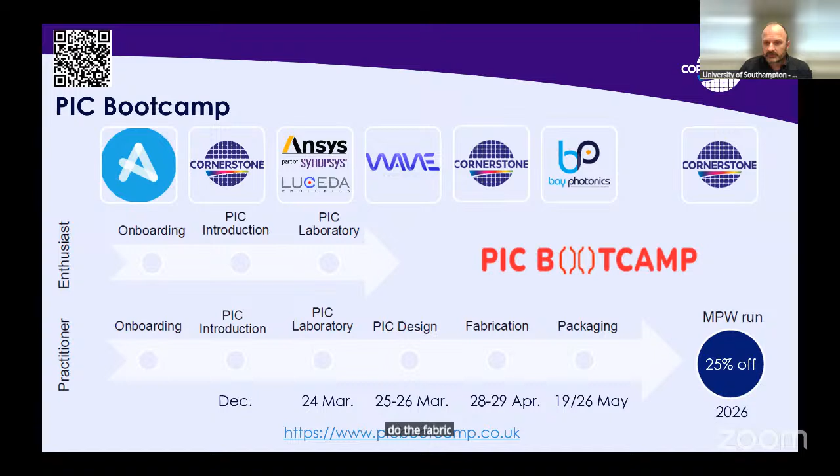We run a bootcamp next year on a number of occasions. If you're interested, just click on the link. Essentially, you come here and interact with different ways of designing these chips and how we actually do the fabrication and measurements. This is quite an interesting training that we run quite regularly, so feel free to click on that.

Now, I wanted to use my second hat to show a little bit of the research and what we use Cornerstone for, and what we do beyond Cornerstone, because we also do our own activity beyond Cornerstone.

So as you know, computing is really power hungry, and we're talking about nuclear power stations to run data centers these days, and literally trillions of dollars to actually feed the infrastructure or even develop it. So this is exponentially increasing. So we need to do something, and this is why we're talking about these things in photonics, I suppose, and all sorts of other activities in neuromorphics as well.

The point of all of this is really to see what silicon photonics can do. There are two ways to look at this: there is data transfer, sending data at the highest bandwidth possible for the lowest amount of energy, and there is also trying to achieve computation using photonics. So I'll touch a little bit on both topics today.

One of the key points in photonics compared to electronics, just to take a step back: the problem with electronics is you have extremely high density of devices, and you can do very fast computation in parallel using GPUs, but the memory is not where the computation occurs. So you need to have data transfer between your memory and your compute constantly, and that costs power, that costs latency. It's a bit of a bottleneck that photonics doesn't really have, and any analog circuit doesn't really suffer this kind of problem.

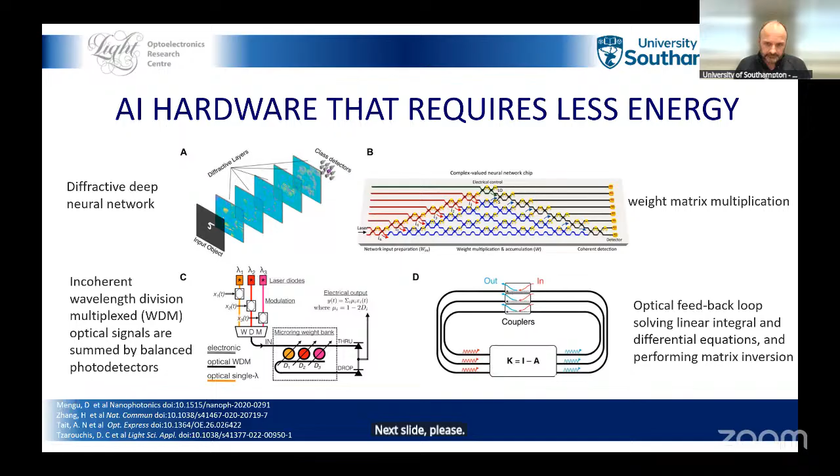Here is an example of what we did with some of the Cornerstone active runs. This is SOI 220 active, for instance. The point of this was just to demonstrate that using a coherent system and PN junction modulators, we could achieve a rate that was way in excess of what, for instance, NVIDIA could produce, with quite a good accuracy as well.

One of the problems with analog type of computation is noise, and that affects your accuracy. How do you deal with that? This is a complex problem that needs to be addressed, and I think we had a bit of a successful system here where we cascaded different types of Mach-Zehnders and tried to achieve this coherent photonic neural network. If you're interested in knowing more, there's a link, and I think the slide will be shared so you can have a look. This was fabricated with the further active runs in Cornerstone.

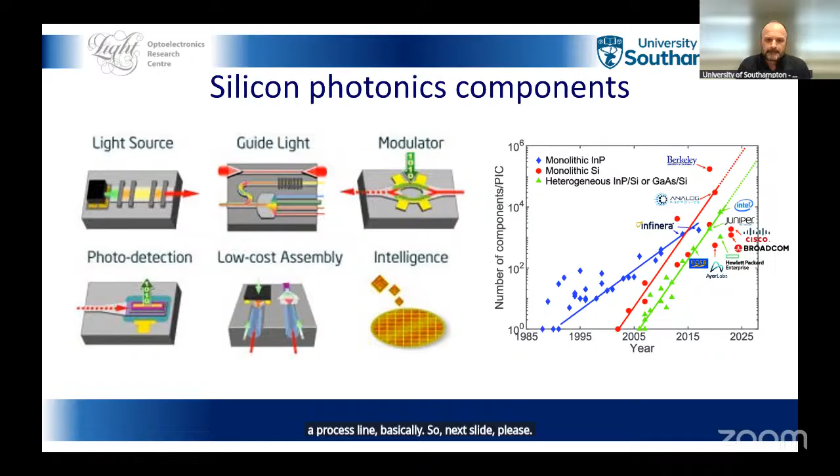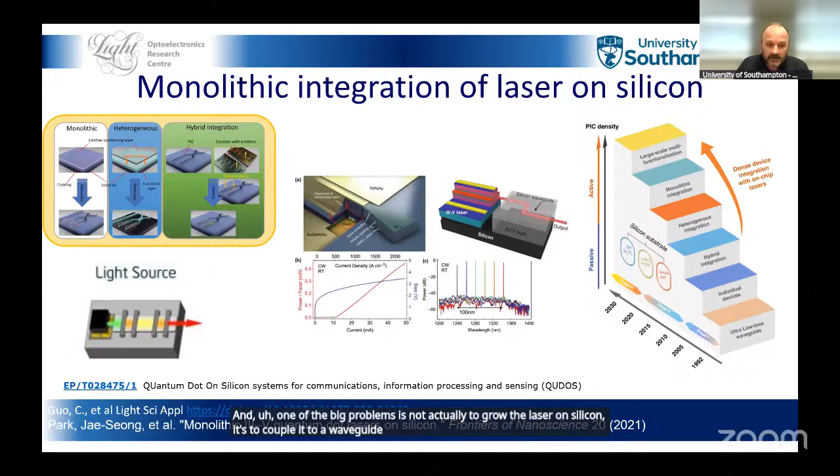So we came up with a process that we can scale up to 200 millimeters and potentially 300. We tried it with the quantum confined Stark effect modulator in the O-band, which is fitted for data centers. The problem with those devices is they're quite thick, a micron plus. So how do you interface that to a waveguide system compatible with CMOS, like silicon or silicon nitride? This is exactly what we've done here. You have this thick stack in the middle, and you try to couple that to a silicon nitride waveguide, as you can see in the cross section at the bottom right. You transfer the light from one to the other, and that works with silicon germanium.

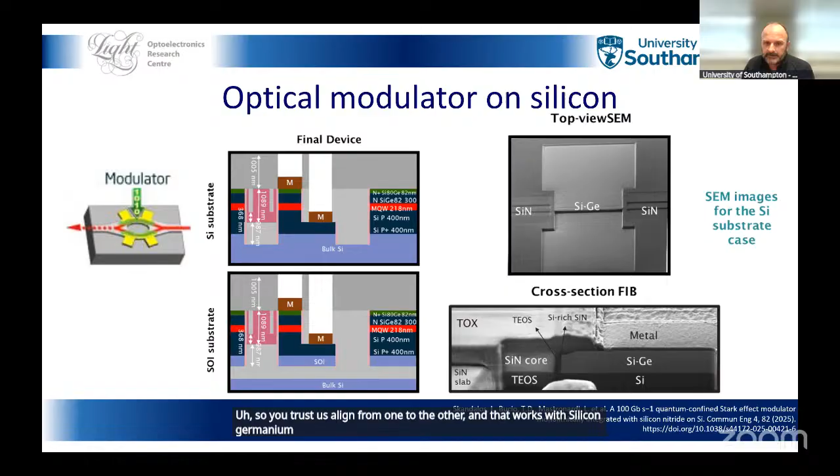That gives you extremely efficient modulation, about 50 microns long, in the O-band. That's quite difficult to achieve with electro-absorption modulators in silicon, because you need a quantum confined Stark effect with quantum wells, matched lattice, and reduced defects. But this is actually possible, and we demonstrated it at wafer scale, getting 100G out of this. So it's showing that we can achieve that. We can transfer the light from high index to low index with about 1.5 dB insertion loss and low reflection.

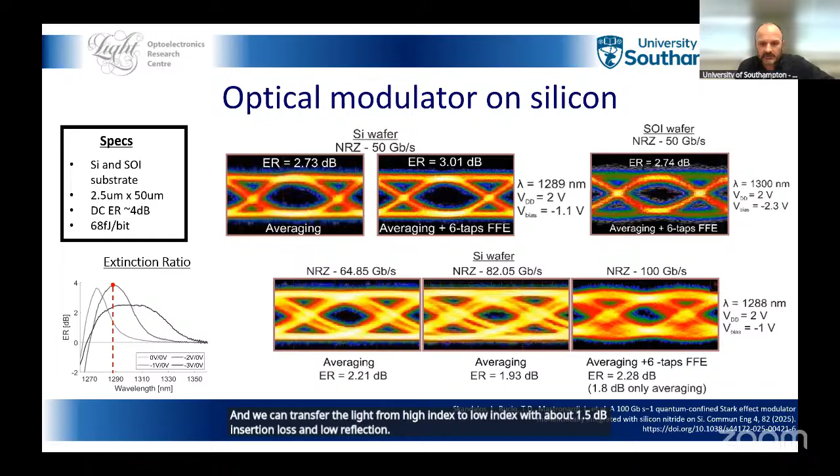The obvious next task is, if you can do that with silicon germanium, you can potentially do that with III-V materials, and this is exactly what we did. You can see that III-V materials, if you have a laser or an amplifier on chip, are 3 or 4 microns thick, so you have to work with that. How do you do it? You use silicon nitride in the same way and try to adapt the mode.

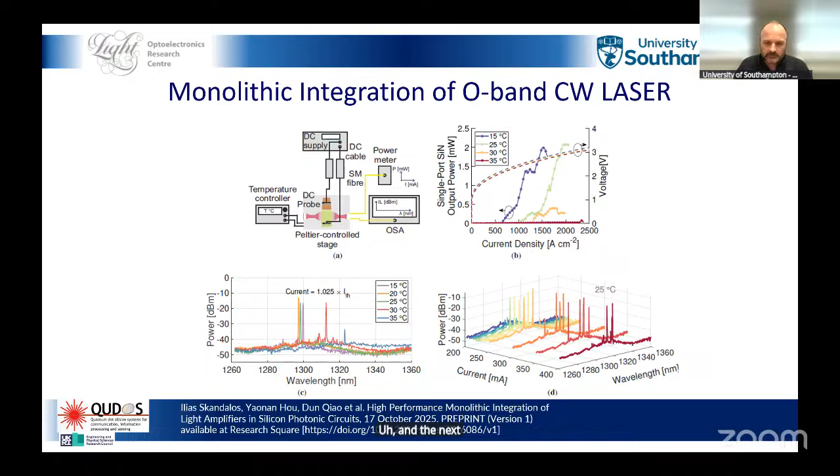This is what we fabricated. You have a device electrically connected in the middle here, with your nitride waveguide on both sides. This is what it looks like, and this is a cross section of the device. We got CW operation out of this, coupled directly to a waveguide. We got a few milliwatts, but we have a couple of iterations on the roadmap that will improve that dramatically down the line. The next step is also to move that to a more stable 200 millimeter platform. That's the CW laser in the O-band.

We also have amplification here, which is the important part, I believe, in any system. If you have switching or any complex system with a lot of cascaded devices, you need something that enables you to amplify your light as you go along—lossless switches, and so on. Again, this is just an early demonstration. We aim for more than 10 dB amplification in the O-band, but this is the first demonstration here.

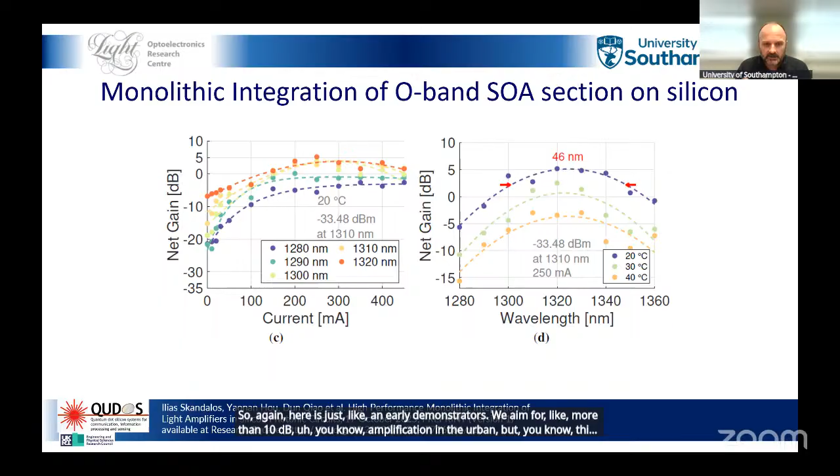So what's next? As I said, for us it's really to drive density of integration, but that comes with needing a native light source and an amplifier. How do you actually achieve that? These were just some examples of what we are planning. Down the line, it's about how you reduce the size of those big lasers, which are 2 or 3 millimeters long, to drive integration further and try to target that VLSI type of system. That's my acknowledgement, and I will stop there. Thank you.

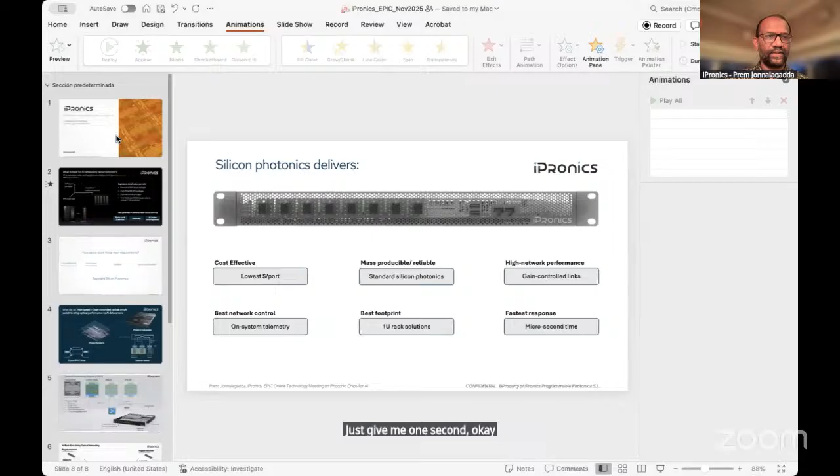Alright, good afternoon everyone. And if you're like me in the Bay Area, California, a very early good morning to you all. Today I'm going to talk about optical circuit switches for AI data centers. That's what we do at iPronics.

I think this is something you all know, don't need to explain too much here, but just to set the context. As you know, the density of AI compute is increasing in terms of GPU dies per package, and also how many GPUs you can fit in a rack, and then how many racks you connect. NVIDIA is executing phenomenally well, releasing a new generation of GPUs every year, and the density is increasing phenomenally. So all this networking for the GPUs has stringent requirements on it. There's the networking within a domain for computation of these AI training workloads, that's scale up, and then connecting all these domains together, that's scale out.

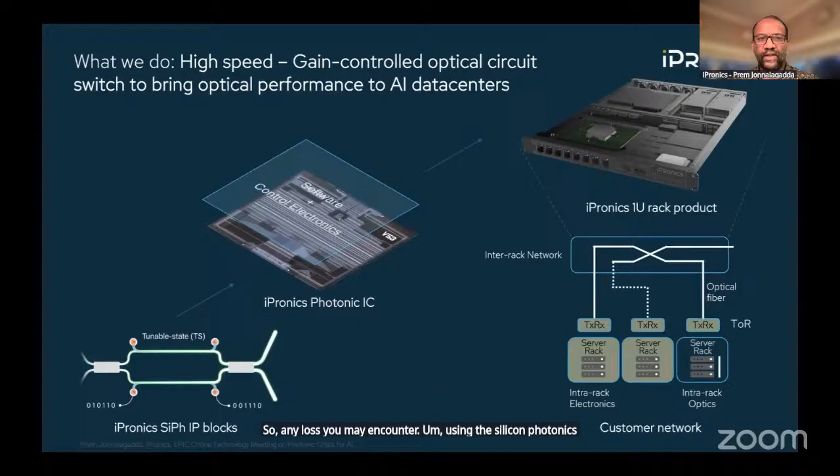Looking at what we have done so far and what we will be doing in the future, at OFC this year we demonstrated our optical networking engine 32, which has 32 ports, and that is sampling to customers since Q2 of this year. We have a 64 port version, 128 and 256 port version on our roadmap.

The system itself, as you can see, has the silicon photonics chip. It has all the control electronics. It has the optical amplifiers, and it's a 1U box for the 32 by 32.

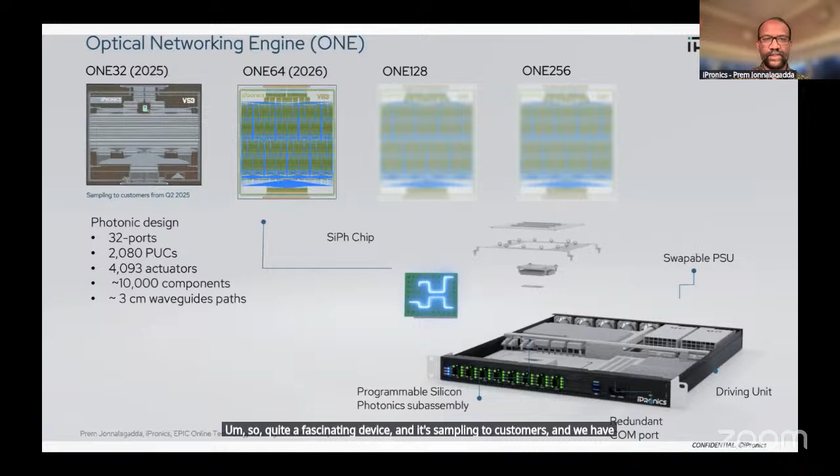It's quite the feat. The chip itself has over 2,000 programmable unit cells, which are basically Mach-Zehnder interferometers. We have about 4,000 actuators, and in total around 10,000 components on the optical subassembly. Quite the fascinating device, and it's sampling to customers, and we have a roadmap to double it next year and the years onwards.

Another interesting thing about our device is it needs to work with existing optical devices out there, whether it's pluggable transceivers, near packaged optics, optical interposers, or even co-packaged optics. You can take the fiber from all of these optical devices and connect them to the optical circuit switch we're building, and you can achieve the optical networking goals that you have.

Using the optical circuit switch, you can actually reduce your link cost, because you're removing a couple of transceivers and potentially an electronic switch in the middle. We also have all the telemetry that is needed, as well as the link gain, which helps with deploying this switch in more places.

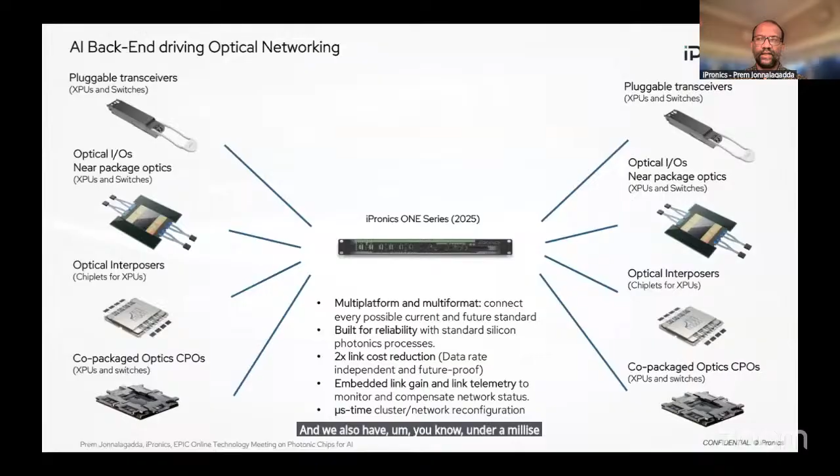And we also have under a millisecond reconfiguration time, which is also helpful for AI workloads.

In summary, we've been using silicon photonics to build these devices, which allows us to build an optical circuit switch that is cost effective. We believe it will be lowest cost per port, with the ability to mass produce these devices and have high reliability.

Other optical circuit switches may use movable parts. There's no movable parts in this one, so that's going to help with reliability. And because we have optical amplifiers, we can bring the optical loss to 0. We also have system telemetry and compact devices, about a 1U rack for the 32 port.

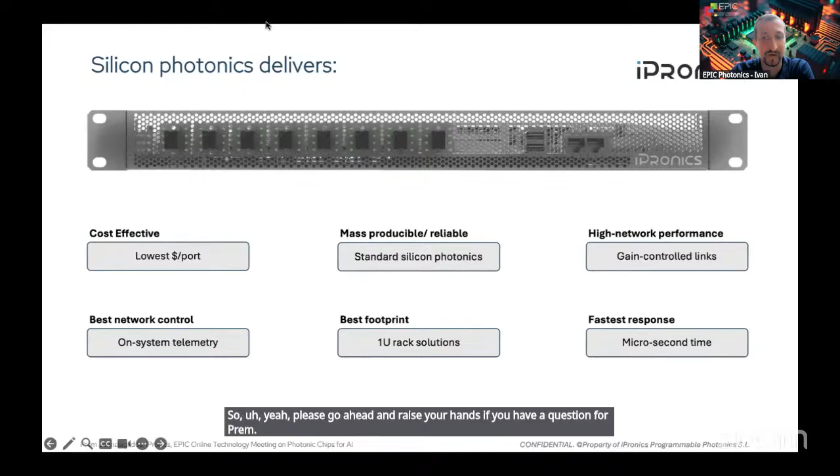In the meantime, I am wondering myself, do you have any forecast for the amount of demand you can get for this kind of device? Yeah, so we are sampling this device to our customers and they are doing evaluations. One number that's out there, public and published by other optical circuit switch vendors, is that in 2030 they believe this market would be about $2 billion of TAM. But we've also heard that it could be much more than that. The most conservative number we have seen is $2 billion TAM in 2030.

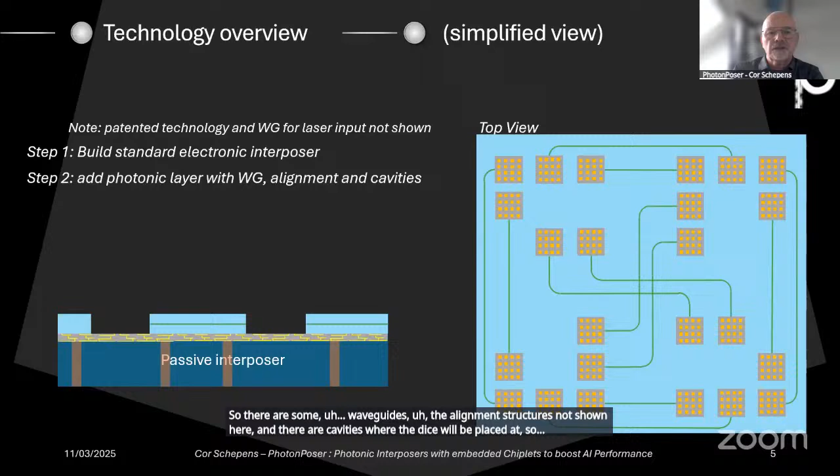So there are some waveguides, the alignment structures not shown here, and there are cavities where the dies will be placed. You see here a top view of the interposer, where there are quite a lot of places where you would need to place the chips.

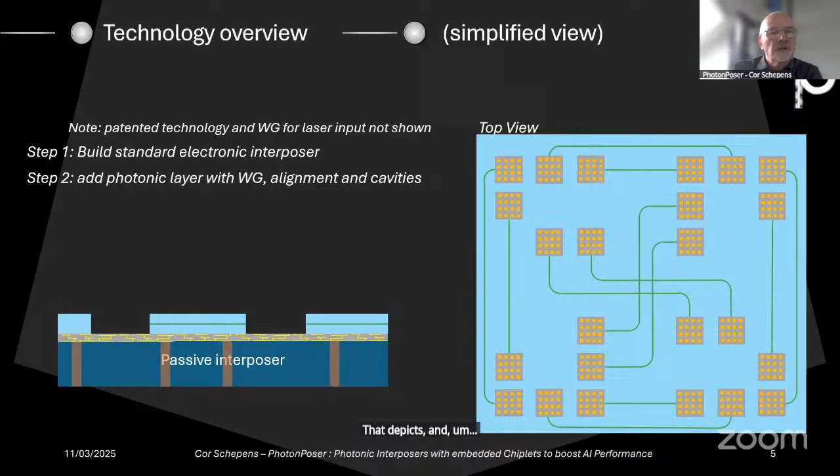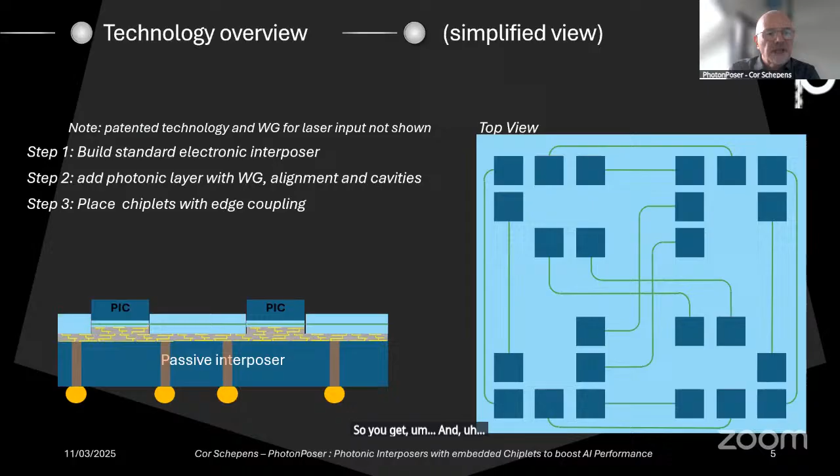Obviously, we do that with these standard die attach tools. So you get an electronic connection at the bottom, and the waveguides are coupled at the edge of the chip.

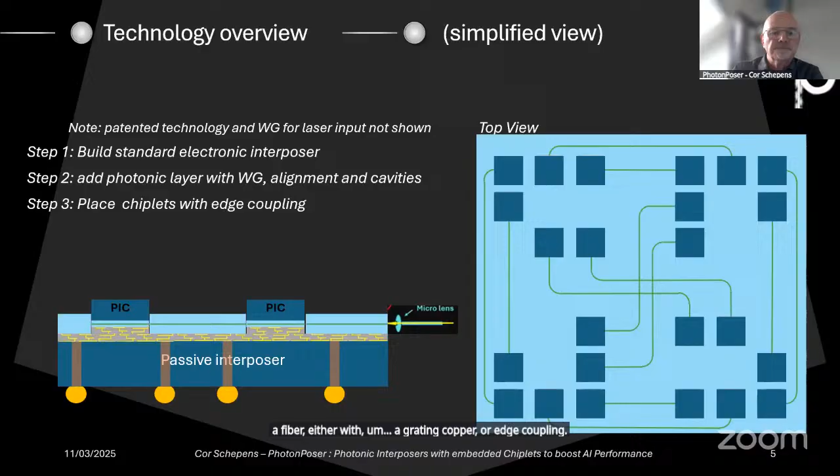Finally, we can also hook up a fiber, either with a grating coupler or edge coupling. So that's in essence what we do.

As the topic of today is on AI, let's take a look at an example from an AI solution here. We'll look at a Blackwell GPU. It has an electronic interposer, not a photonic interposer yet, but it's made by TSMC.

TSMC is doing a lot of interposers, and they have 3 flavors, and the last one is called CoWoS L, and that is also used for Blackwell, along with a co-packaged optics solution.

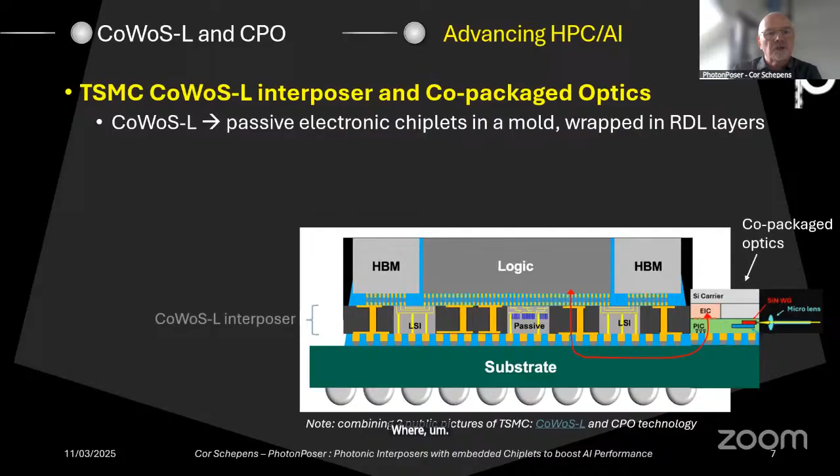If we look at that, here's kind of a cross-section of that, where we have the CoWoS layer—let's see if we can get a laser pointer. So it's basically this part here, where there are some simple chiplets integrated into a molded part. That's the black part.

And then it's, let's say, wrapped with some RDL layers at the top and at the bottom. That's basically the interposer as it's done nowadays by TSMC.

And then on this side here, we have a PIC with a driver which is bonded on there at wafer level. That's a chip that's going to be placed on the substrate inside the package, on the edge of the package, basically.

And there you also hook up a fiber, either again with grating coupling or with edge coupling, as it's shown here. But what this still gets is, like, we have short wires for the HBM that's connecting here, but...

For getting from the GPU, which is called logic here, to go to the EIC, it's a longer path, and that is requesting some more power, and might also impact some speed, going through all of those micro bumps and then some larger bumps on the substrate.

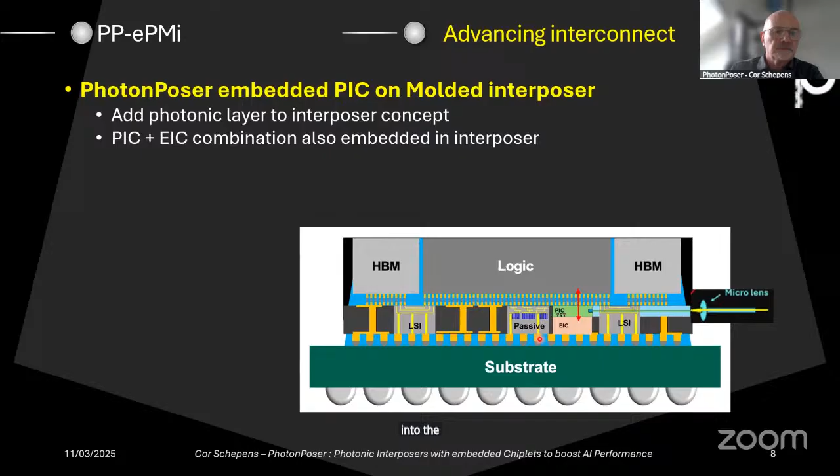And then you move this PIC and its driver into the interposer as well. In that way, you can shorten the path between the GPU and the EIC, and potentially get some speed increase and save definitely something on power. Besides that, it also makes the package somewhat smaller.

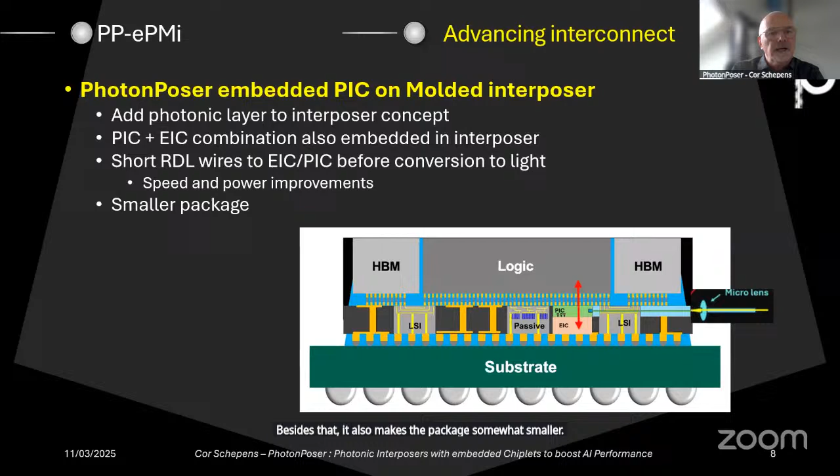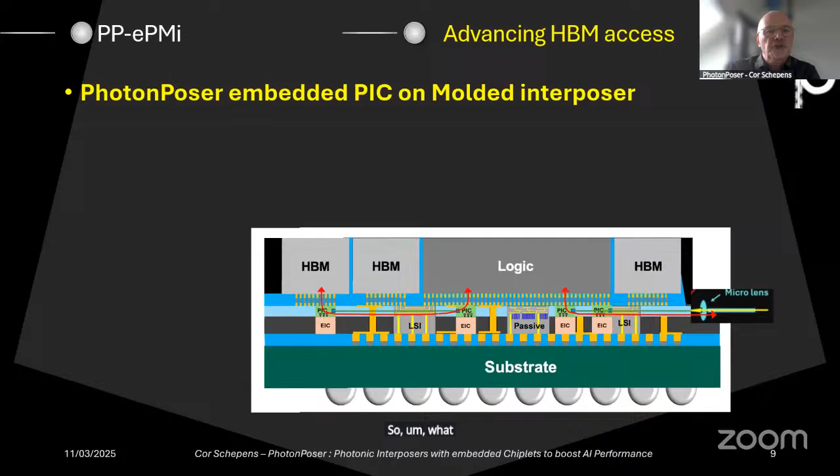But that in itself might not be enough to justify the cost of adding this photonic layer. So what else can we do? Another example is just adding extra high bandwidth memory here, over a longer distance. That has some more problems in the connection, but when we do this over a waveguide, we can go for this longer distance. Even more, we potentially can go at a higher speed, and we can also add more bits per cycle when we have bits multiplexed over the waveguide. So that's certainly a benefit.

There is a study out there that shows that when you quadruple the amount of HBM around the GPU, it can basically run larger matrix multiplications, and that would allow you to halve the amount of data transfer that goes in and out of the board. As that is your bottleneck, that could also significantly improve the AI performance.

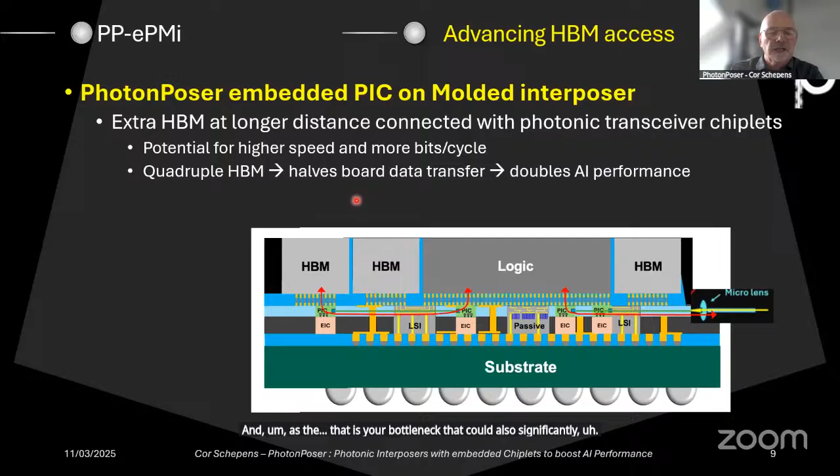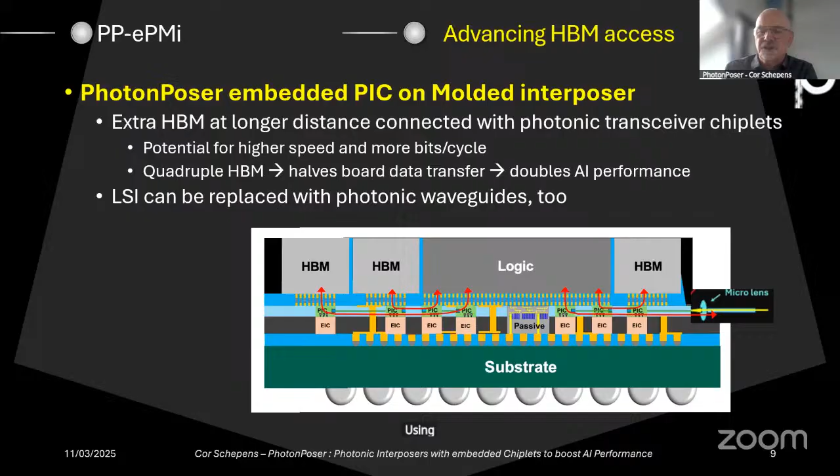And obviously, if you have already this HBM going over a waveguide, then also the other one probably can be replaced as well, using the same way of working. So that is basically what I want to show you today.

So we have a photonic interposer that provides a path to high volume photonic systems, not just for AI applications, but can also be used for datacom, photonic computing, or quantum computing. It's a simple, low cost, high yield solution. We don't need a lot of masks to make these, at least with respect to the photonic layer. And it's going to be low loss and high performance.

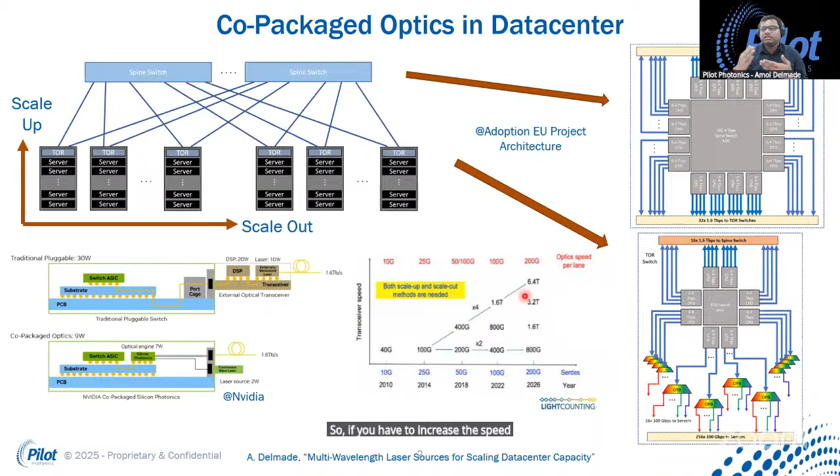But our switch ASIC is like almost hundreds of Tbps. So if you have to increase the speed, you need to go for parallelism, that is WDM kind of solution. So there is limited growth in SerDes and per-lane optical speed, hence a need for optical parallelism. Currently there are typically one, two, or four lasers used, and most of these are O-band lasers, spaced almost 20 nanometers away from each other. This is a typical wavelength span considered for data center switching interconnects across almost all technologies, but currently the lasers are spaced almost 20 nanometers.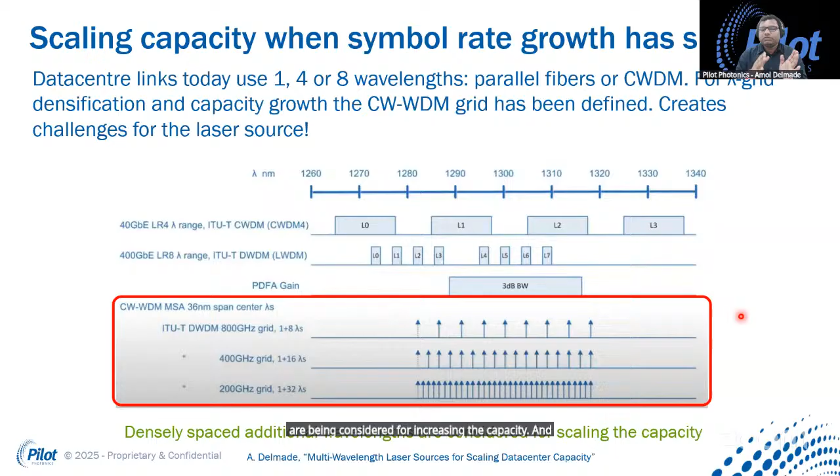But if you have to go for more parallelism, increasing the number of wavelengths and so on, you have to go much finer in the wavelength region. There are standards such as CW WDM MSA standard, which consider 800 gig, 400 gig, and 200 gigahertz channels, using 8, 16, or 32 wavelengths. So there is a need for densely spaced additional wavelengths to increase capacity, and Pilot Photonics is developing a couple of solutions to address this need.

So what are the typical laser source requirements for CPOs? The number of wavelengths required are 4, 8, or 16. The spacing between those channels needs to be 200 or 400 gigahertz, with slight fluctuation allowed. The typical RIN is less than minus 145 dBc per hertz. Power should be around 15 dBm or more. These lasers need to support advanced modulation format signals such as PAM4 or PAM8.

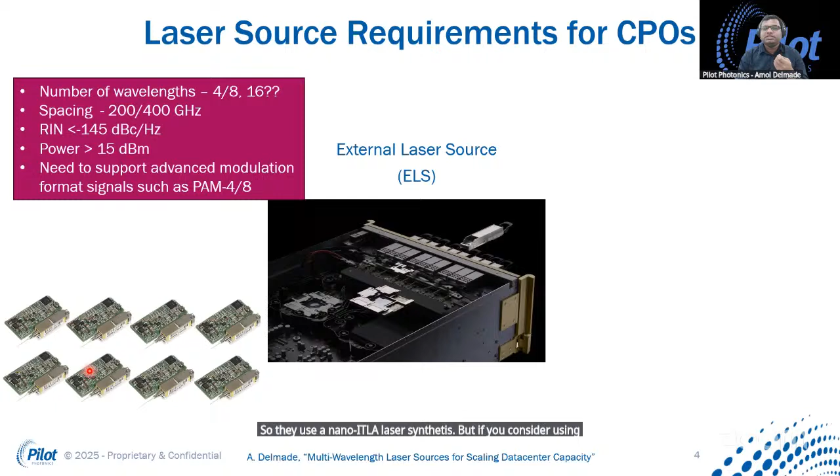As shown in the previous figure, the laser sources will be external to the CPO switch or entire ASICs, because currently we can use nano ITLA lasers inside pluggable optics. But if you consider using multiple nano ITLA lasers, like 4 or 8, beside each other in a pluggable, it will be very difficult to manage. That's why you need dedicated laser solutions designed for such applications.

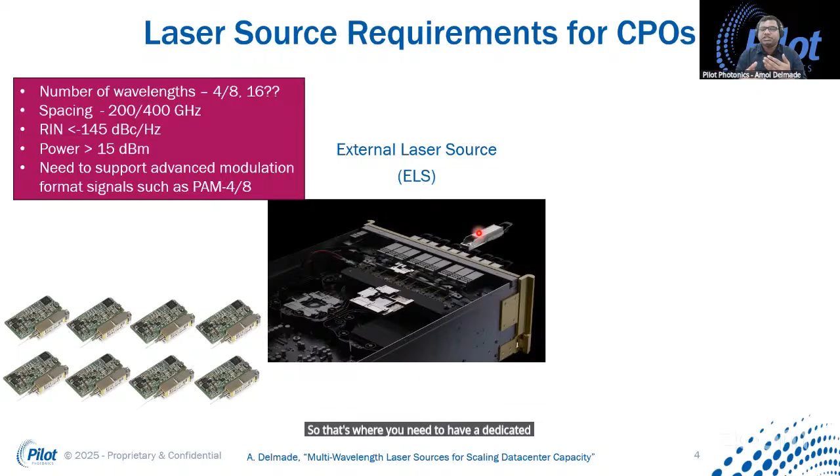The main reason for keeping the lasers outside of the switch ASIC or CPO switches is that it helps decouple the thermal from the main switch ASIC chassis. As mentioned by the previous speaker, there are temperature and thermal issues if photonics are placed very close to it, and lasers especially are very sensitive to thermal changes, causing wavelength drift. That's why the industry is moving toward using external laser sources in an ELSFP pluggable form factor, which also helps mitigate premature aging by avoiding thermal cycling. Also, if something goes wrong with the laser, you can easily replace it by just changing the pluggable module.

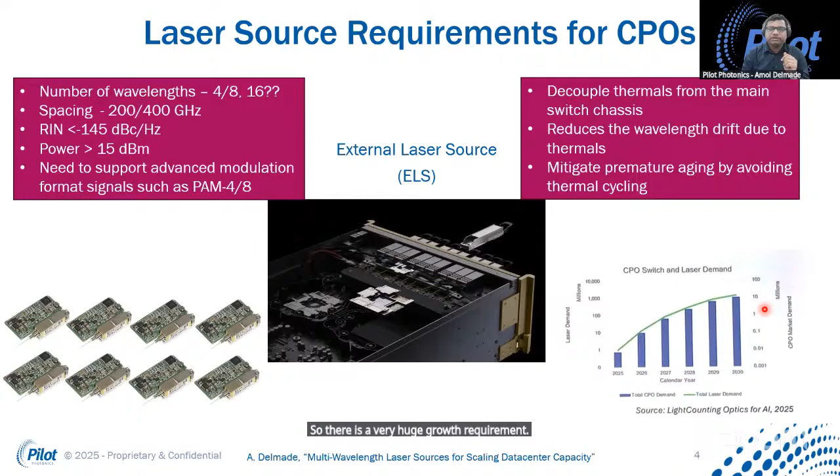There is a projection from LightCounting showing that demand for lasers will increase to almost a billion units as we move towards 2030, as CPO switches grow to tens of millions. So there is a huge growth forecast driving the development of unique laser sources for this application, and small form factor external laser sources in a pluggable are becoming standard now.

As I mentioned, Pilot Photonics is developing a couple of laser solutions for this target segment. Our first one is a laser array PIC, and we have two different variants: one is a DBR laser array and another is a DFB laser array. This is our DBR 16 channel laser array PIC, in a standard form factor, or we also have them in a staggered form factor. And this is our DBR laser array chip.

All the lasers are 200 gigahertz spaced and aligned with the MSA CW WDM standard. Each is capable of giving 15 dBm output power and less than minus 145 dB RIN. All these DBR laser arrays have an SOA attached to get to higher power, and they are excellent sources for IMDD systems such as PAM4 and PAM8.

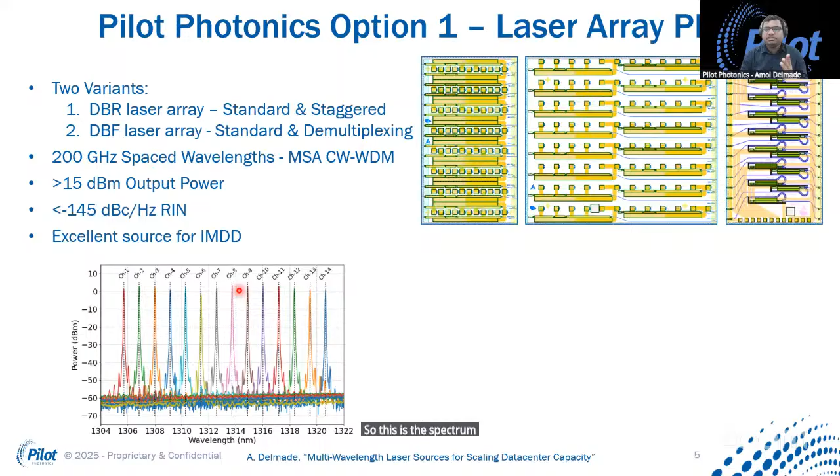This is the spectrum of our laser array chip from the DBR laser array, and this is a packaged unit that we are putting into a pluggable form factor. In this case, this will be our laser array with control electronics attached to it. So this is the one option we have.

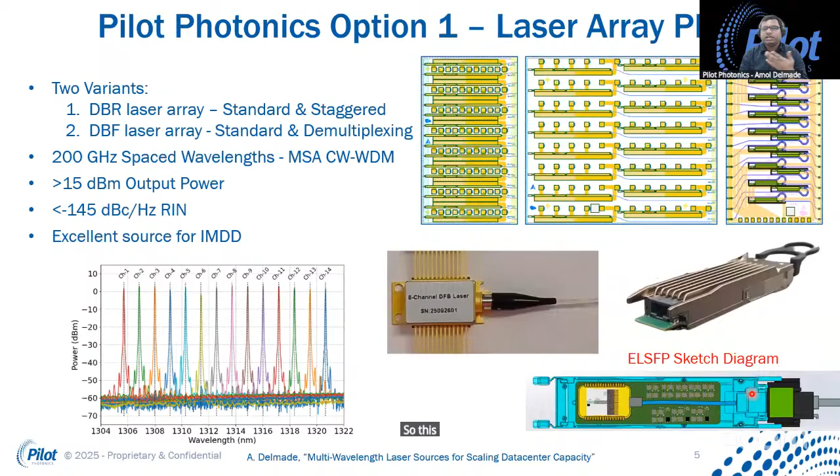The second option is for coherent lasers. Even if you want to go to 32 or 64 lasers, adding so many lasers in a single chip will be very difficult, so there is a requirement for higher densification with tighter channel spacing. That's when optical frequency combs come into play, because from a single device you can achieve so many wavelengths. Also, if you want to further increase the capacity for 400 gigs per lane or even higher, people might consider going for coherent modulation inside the data centers as well.

For such coherent modulation, the frequency and phase correlation also affects a lot, because if your lasers are frequency and phase correlated, that will help to reduce the DSP overhead and power consumption.

That's when Pilot Photonics is developing a micro ring resonator comb source. We have a micro ring resonator which we can pump with an external laser source, and it will generate multiple lines. But there have been some issues, because there are a couple of vendors already in the market. The major problem in using comb sources is the power per line and RIN limitation. And that's when Pilot Photonics patented technology comes into play.

So we use a combination of a comb source as well as laser array solutions. We have a generator comb source using micro ring resonator, and then we feed that comb to a laser array unit. That helps us filter out the individual lines and boost the power. So the frequency and phase correlation will come from the comb side, while the power and RIN will come from the laser array side, helping us boost the power and performance.

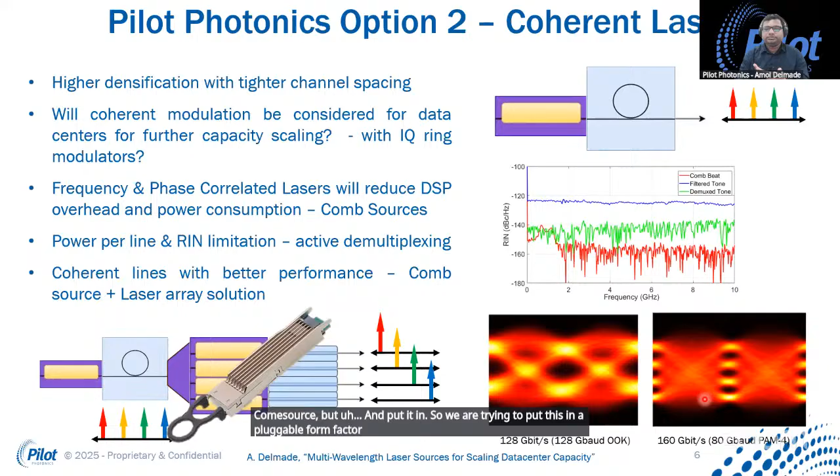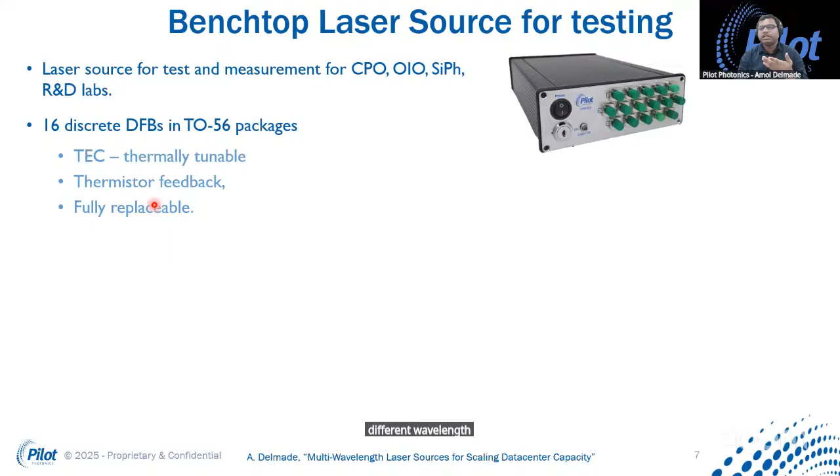We couldn't move the data rate forward because of the availability of only one modulator to modulate all 16 channels, but we are trying to procure more components to further show its capabilities.

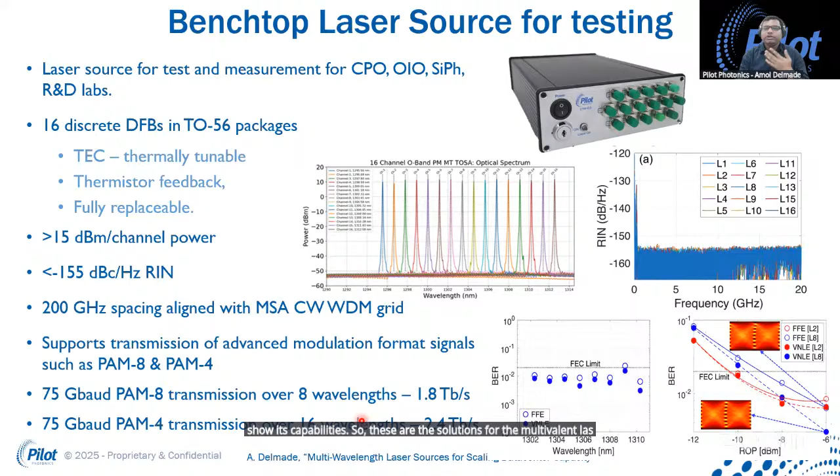So these are the solutions for the multi-wavelength laser source, but there are still a few vendors considering use of pluggable transceivers. Those might be possible for scale-out, scale-across or DCI applications, especially if you go for LPO or LRO pluggables, because they can achieve a little bit lower power consumption and they will need just a tunable laser source inside.

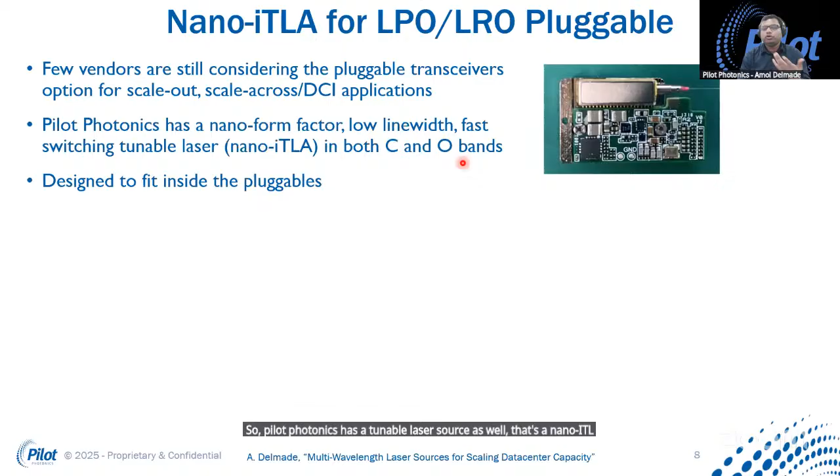So Pilot Photonics has a tunable laser source as well, a nano ITLA in both C and O band form factors. We can achieve entire O band tunability just from a single laser. It's not continuously tunable, it's tuned over every 50 gigahertz grid.

That's because CPOs or these applications require every 200 gigahertz spacing, even if you consider any data center application, so this will be sufficient. These lasers can achieve more than 13 dBm power, and they have less than 250 kilohertz linewidth.

The best part about this laser is we can tune from one wavelength to another in less than 10 nanoseconds. So if you're looking for fast switching of the wavelength, that's also possible with these devices.

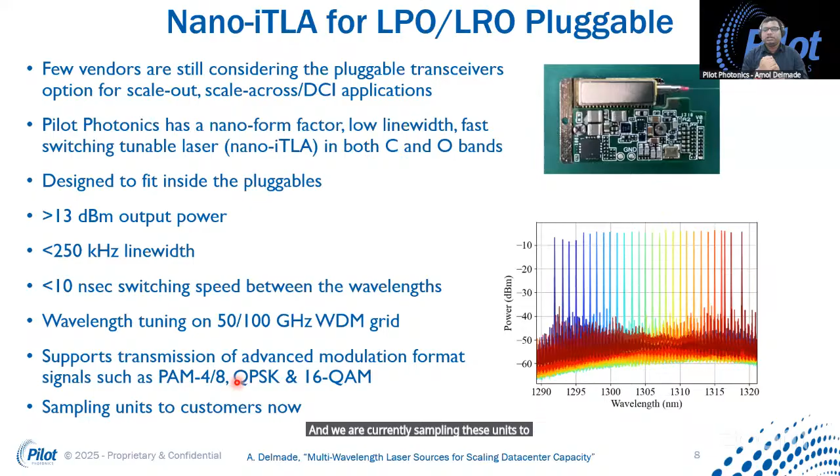And it supports the transmission of advanced modulation format signals such as PAM4, PAM8, QPSK, and 16 QAM as well. We are currently sampling these units to customers, so if you are interested, please get in touch with us.

Just to summarize with a key takeaway: there is massive optical parallelism required in scale up, scale out segments. Multi-wavelength sources in pluggable form factors are suitable to boost capacity. Pilot Photonics provides a few options to fulfill the market need. We have DBR, DFB options which are best suitable for IMDD link options. Then we have comb source plus laser array for next generation interconnect, which can support higher speed, 400 Gbps or higher, or even if you're considering going for coherent modulation inside the data centers.

So if you have further questions, please ask me, or you can get in touch with me or through our sales channel as well. Thanks for your attention.

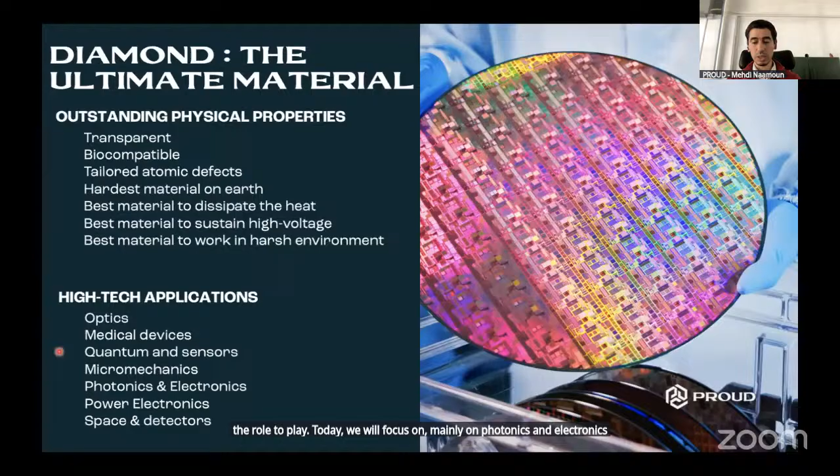Today we'll focus mainly on photonics and electronics, but I also want to talk about what makes us different at PROUD Technology: our ability to grow diamond on any type of semiconductor material without a buffer layer. As a result, you can really benefit from all the outstanding physical properties of diamond directly, as an immediate benefit.

For example, for thermal dissipation—which is really the focus within PROUD today—the company is focusing on tackling the problem of heat management for AI chips, because they're getting more and more powerful, but we still need to get rid of all this generated heat. This is really a game changer when we can introduce diamond as a way to get rid of this heat.

Now, regarding what we can offer to the EPIC community: today our solution is to offer diamond for different applications, like semiconductor and photonic platforms, mainly at different stages—for power devices, for integrated thermal management, or if you want to integrate diamond combined with your own material, we can also work on that. One thing to mention is that the diamond we grow is electrically insulated, but we can also get a very highly conductive layer just by doping, getting close to a metallic transition.

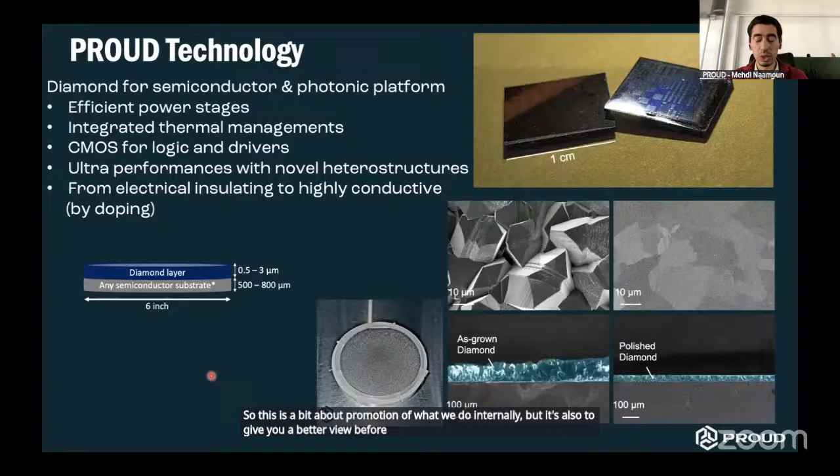So this is a bit of promotion about what we do internally, but it's also to give you a better overview before going into the detail of the talk. Today I'll really focus on the implementation of our technology for the photonic platform, specifically for glass interposers for 3D SOIP applications.

Let me take a few minutes on the glass interposer. I'm not a specialist myself, but just to remind everyone: glass interposers are substrates that enable electrical interconnection of multiple ICs over shorter distances with high input-output density, and also enable optical interconnection between photonic chips—this consistently differs from standard PCB. This is a schematic: you have a glass core material, and then different interconnections of the ICs.

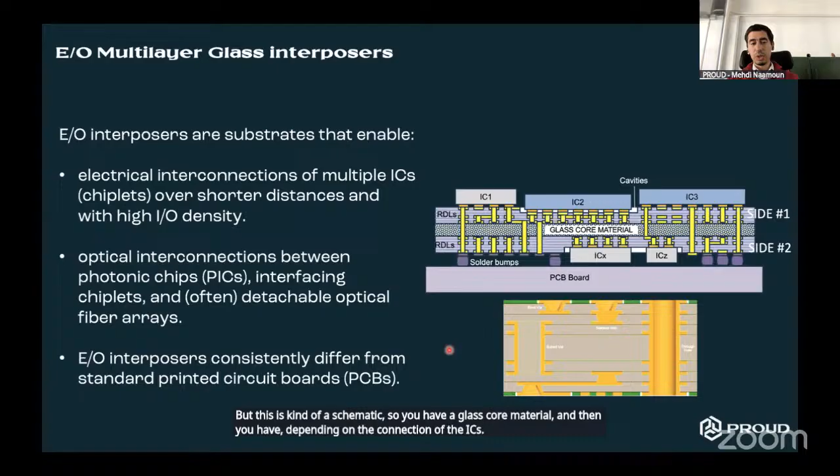One thing about glass interposers, compared with what's on the market, is that they have some drawbacks. This was brought to us by another EPIC member—thanks to EPIC for this connection—and we're now in contact with Phospack, a Finnish deep tech company offering design and prototyping services. It's a fabless company focused on glass interposers, offering different types of vias and solder balls. You have details on the slide, so you can directly contact Giovanni, the CTO of the company.

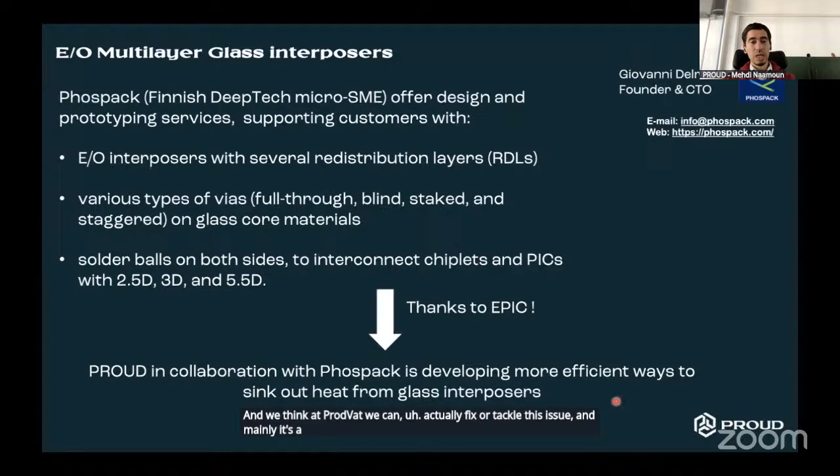But he approached us with a problem with this glass interposer, and we think at PROUD that we can actually fix or tackle this issue, mainly a heat problem. The major issue is that we're going to get multi-layer solutions, typically with stacking of different chiplets and interconnections, so the complexity of 3D IC design will just be exploding in the coming years.

If we continue with silicon interposers, which are already the material being used, it has its benefits—very good thermal conduction. However, there is also very low bulk resistivity that affects signal integrity. On the other hand, glass interposers exhibit excellent dielectric properties, but very poor thermal conductivity.

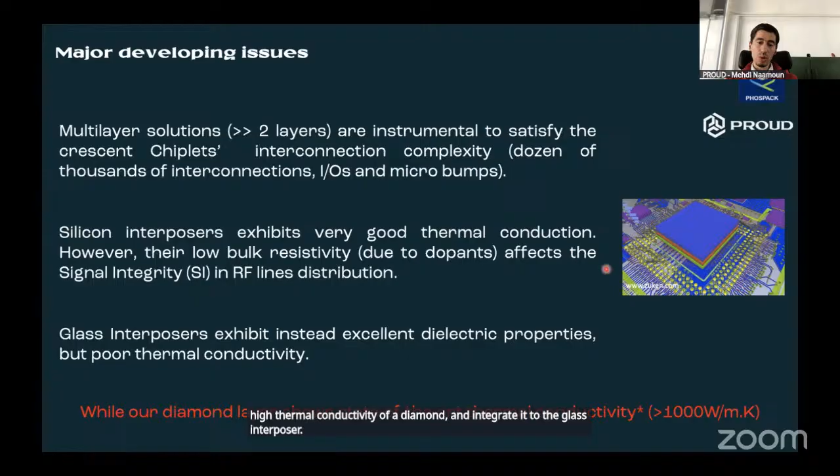So basically, our idea was: why should we, how could we combine the diamond layer with the glass interposer, so we can benefit from the very high thermal conductivity of diamond and integrate it into the glass interposer. So typically, our solution is really to be able to first bring this very high thermal conductivity of diamond directly onto the layer of the glass.

At different levels, first one will be really to dissipate the heat horizontally among the RDL layers. So there will be a reduction of the local thermal gradient, which will also be beneficial. Then we can connect all the thermal vias just by having this thermally conductive plane. So at the end of the day, you will have less requirement on thermal vias, fewer thermal vias, and also you will be lowering the area penalty.

And also, as we will need to tackle the problem of stacking, we will have the need to also go intra-layer. So really having the diamond inside the different layers of your IC. Also, one thing will be to go even on the backside of the power delivery network. So at the end, our solution, as we discussed also with Phospack, will be to make the glass interposer workable for the next generation of data centers just by adding superior thermal management thanks to the diamond layer.

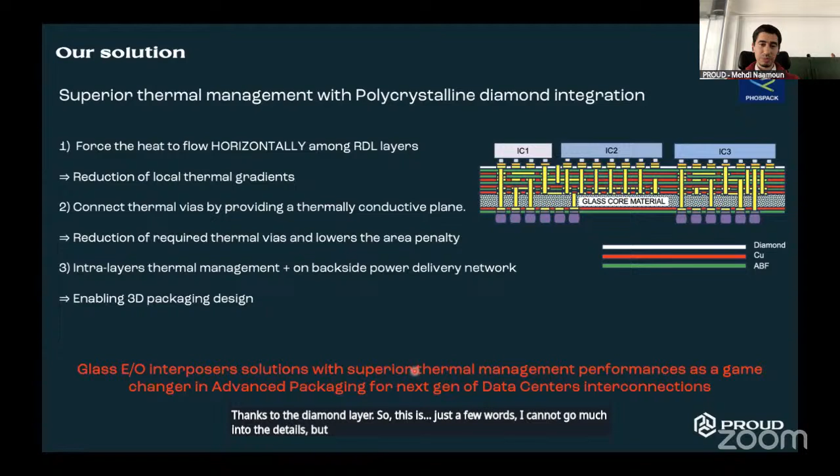So this is just a few words. I cannot go much into the details, but we are very open to discussion on that topic. We really want to get some help as well from EPIC members. It could be in different ways: technical support, pilot project, new ideas, co-development solutions, and also, of course, if you have heard about grant proposals or funding, we are very much welcome to hear about that. And thank you for listening.

Go ahead. Yeah, thank you. Nice presentation, Mehdi. I saw it seems you can CMP your layer, but can you also etch it? Yes, indeed, we can etch it. And we have all the processes to etch the diamond quite easily, so you can do patterning as well.

Okay, because it's obviously also important to do. So, okay. Yeah, good, sounds very interesting. I think indeed we should talk. Good. All right, thank you. Anyone else?

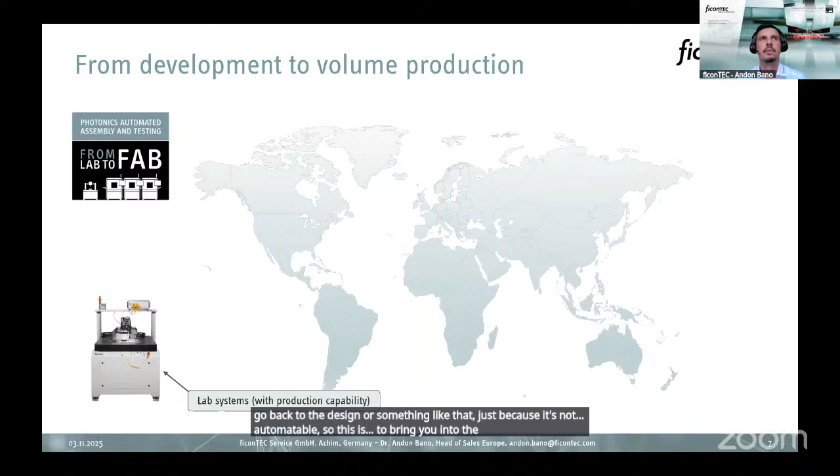The second type of machines that we're offering increases a little bit the level of automation. This is a closed door platform where you could already move into batch production. It's made for production, for volume, but at the same time there is some human interaction. You need an operator to prepare some trays, to load them, unload them, and keep the machine running. At the same time, with this machine you'll have some possibility to repurpose it, to change your products - maybe not every day like in the first machine, or every week, but still every couple of months, every few months. This is a machine that will allow you some development capabilities.

The third level of automation is when you have a machine that has to be run always by an operator, and here you can practically have a loader and an unloader, automatic ones, and then you just prepare trays and load and unload them.

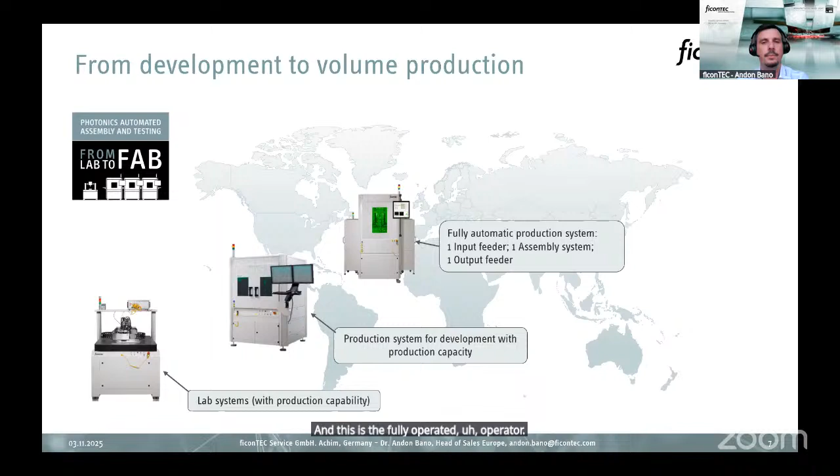This means that practically you could load only raw materials in front, and then you would get fully assembled and tested packages on the other side. We have done this already in the automotive industry, where the standards are quite harsh, and we have done this for LiDARs, cameras, and sensors for the automotive industry quite successfully.

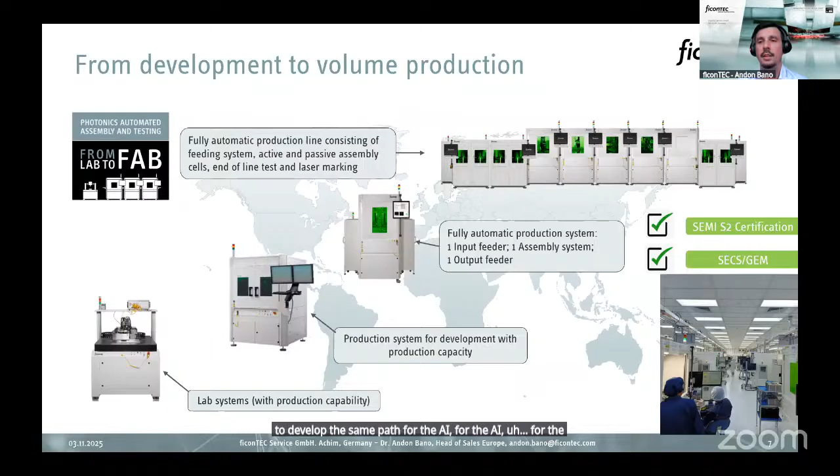And we're ready now to develop the same path for the AI demands. From this point on, I will show you a few technologies that we have been working on lately. Starting from what, in terms of photonics, is AI demanding from us? What are these optical engines? What do they require from the technical standpoint?

Starting from a wafer level, of course, wafer testers have been around quite some time in photonics as well. But ficonTEC this year just recently launched a double-sided wafer tester for the COUPE technology, where the electric chips are from on one side and the photonic chips are on the other side. Practically, you could do simultaneous dual testing within the same machine, but a machine which is actually compatible with automatic test equipment, ATEs, standard ATEs, which OSATs and foundries are already familiar with in the semiconductor industry.

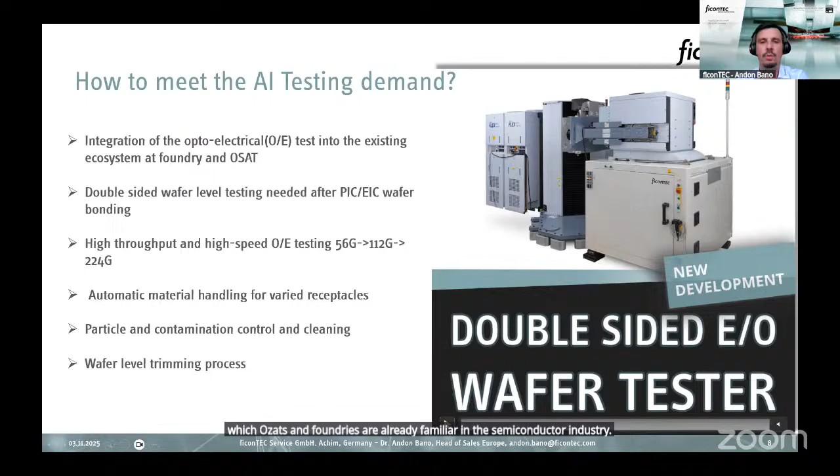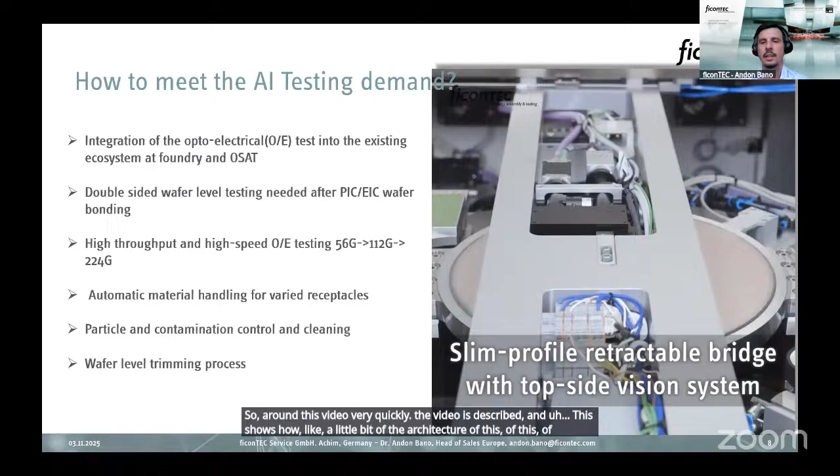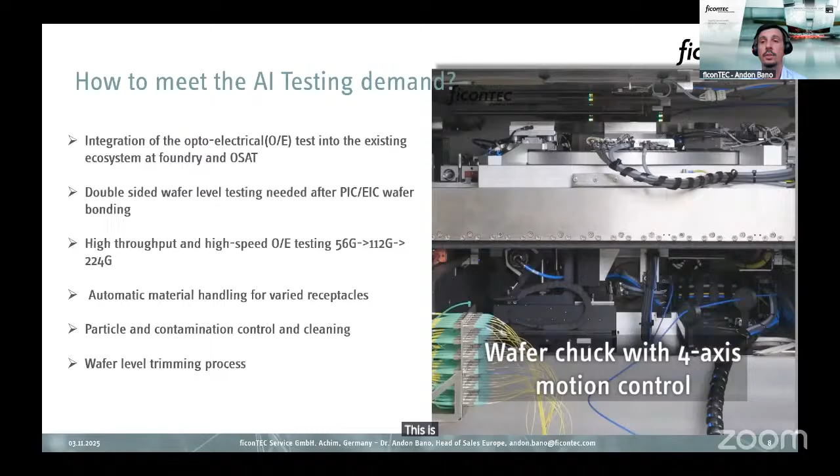So I will run this video very quickly. The video shows a bit of the architecture of this machine. There is a wafer table where the wafer is loaded, and then there is ATE compatibility that comes from the top. This is important also for the high frequency small signal analysis, when you want to do full characterization of the chip on the wafer level.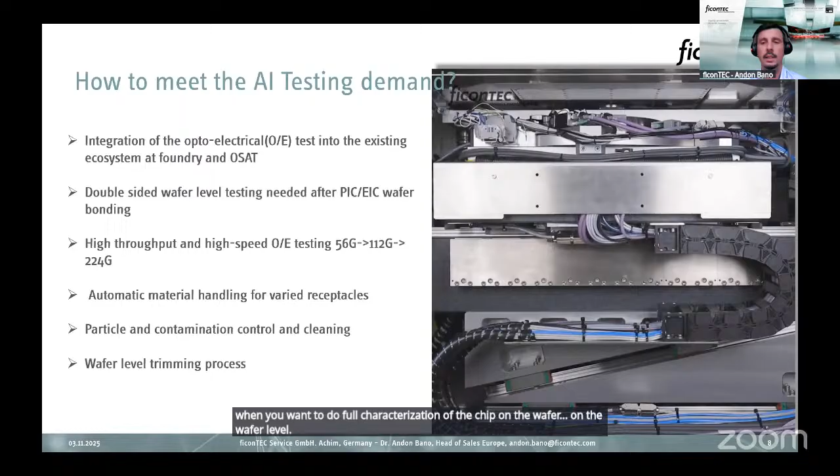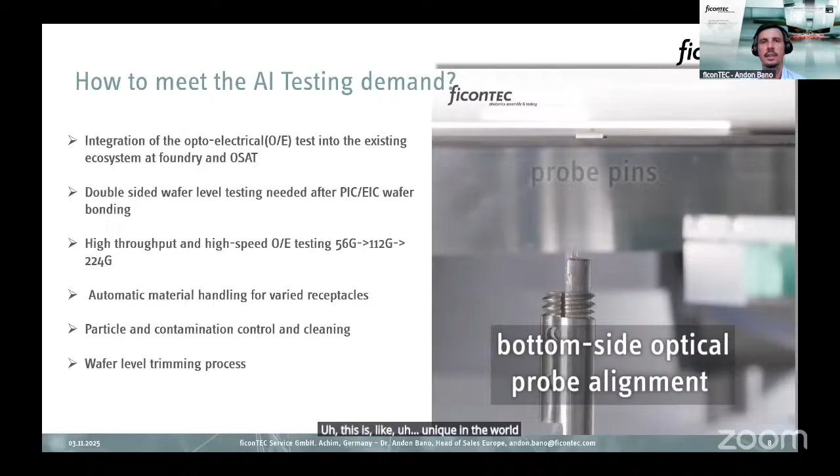And then from the bottom comes the 6-axis engines with the photonics active alignment for optical probing. The optical probing then can be both edge and grating couplers. This is unique in the world. This technology is serving the double-sided wafer tester. Of course, the same techniques can be applied for single-sided, either electro-optical or only optical testers at the wafer and the die level.

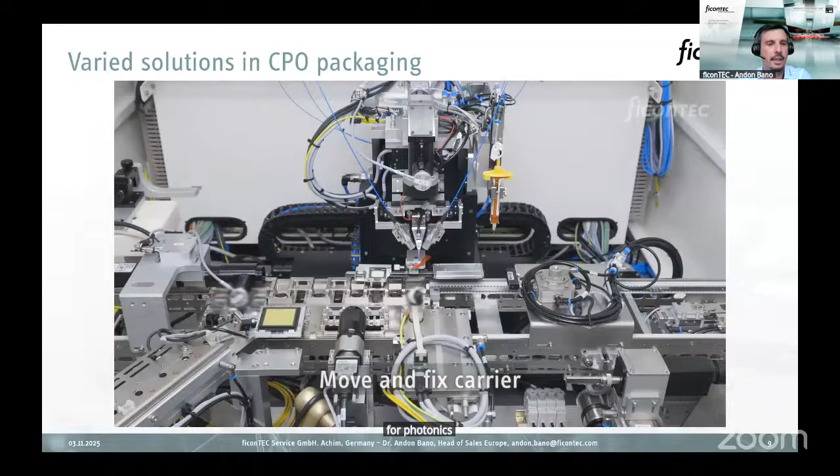What else is needed, here I put another video where we show the other part of the value chain that ficonTEC offers. So we do not offer only testing, but the full chain from testing until the full packaging. Here you also see a few dedicated steps for optical assembly and testing for photonics and AI applications. So let me run the video.

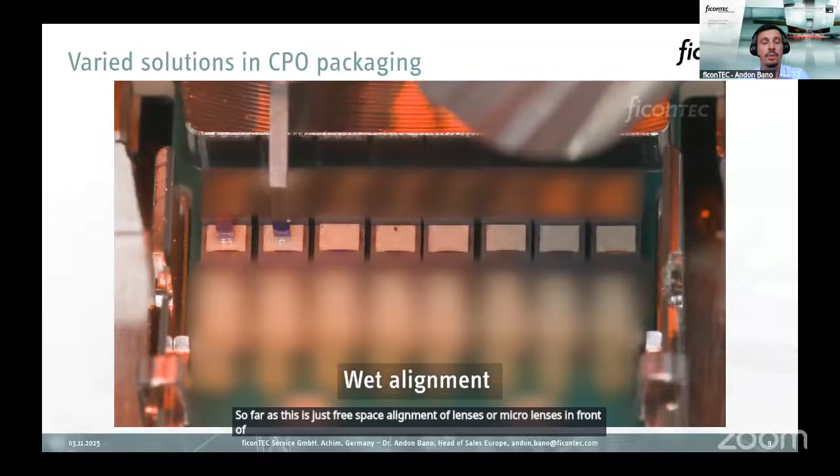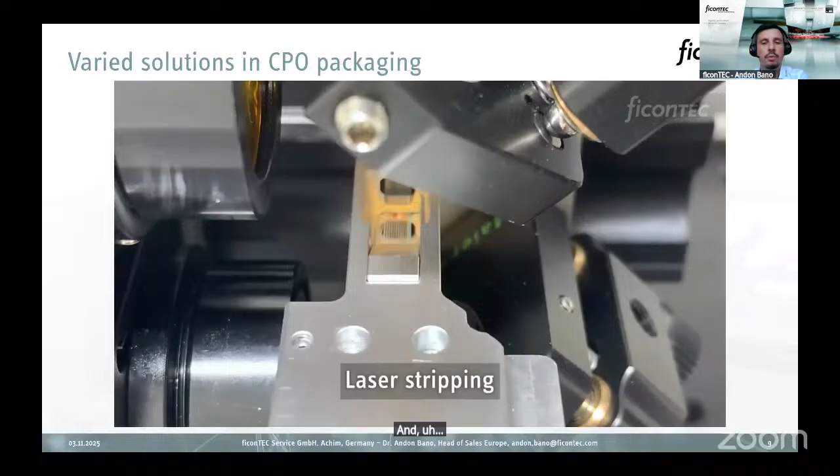First, this is just free space alignment of lenses or micro lenses in front of photonic chips or in front of lasers. This is an active alignment process. The second one is FAU attachment, and then you'll see some fiber preparation. This is a fiber preparation solution, so it's laser stripping, and then you'll see some connectorizing afterwards.

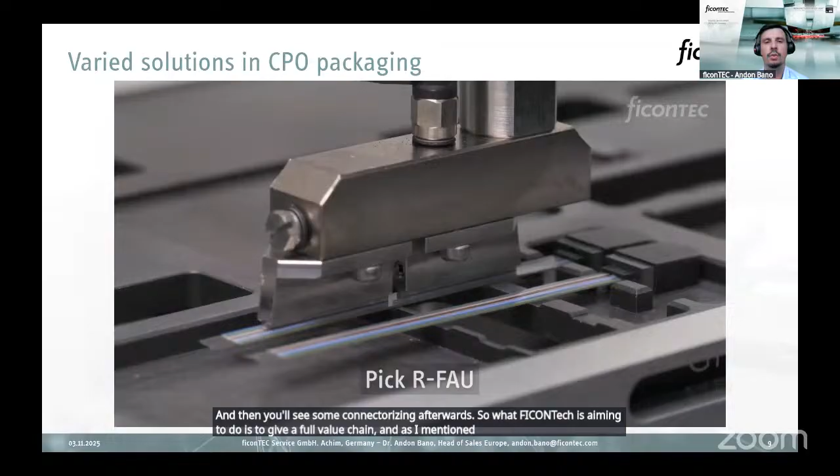So what ficonTEC is aiming to do is give a full value chain, and as I mentioned in the automotive industry, we have achieved that by loading raw materials, starting from the package, plastics, optics, sensors, electronics, all of the raw material up front, and then having a packaged LiDAR every few seconds as an output. We want to achieve the same for the optical engines.

What does this mean? So far we can automate fiber butt coupling, we can automate free space alignment, we can automate wafer testing, but actually what we want to do is have the connection between the cells, these machines, done in an automatic way. For that reason, we want also to have this fiber preparation tool where you can put a spool of fiber, unspool it, strip it, cleave it, have prepared connectorized FAUs, connect them to another machine where you can grip these FAUs and attach them to your chip and so on and so forth.

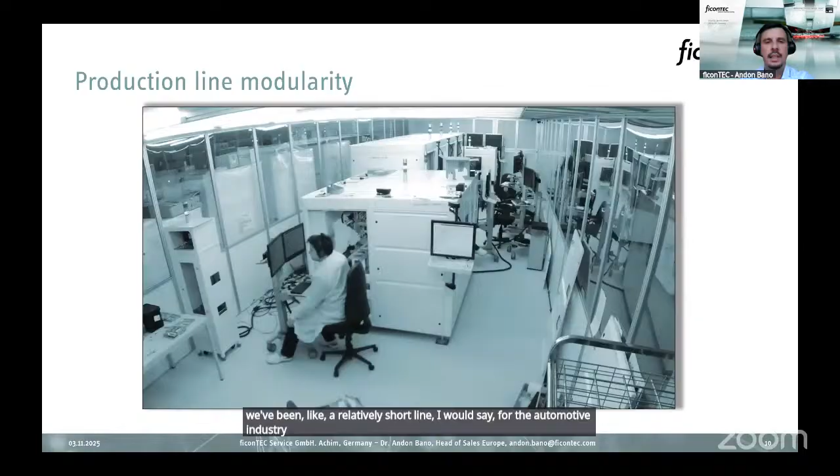So like this, you can go uninterrupted for a long chain of processes within the same line. In the next video, I'll just show you how we've been building a photonic line. This has been at ficonTEC. This is a relatively short line, I would say, for the automotive industry that we built, and we want to use this same experience in AI, and we are ready to do that.

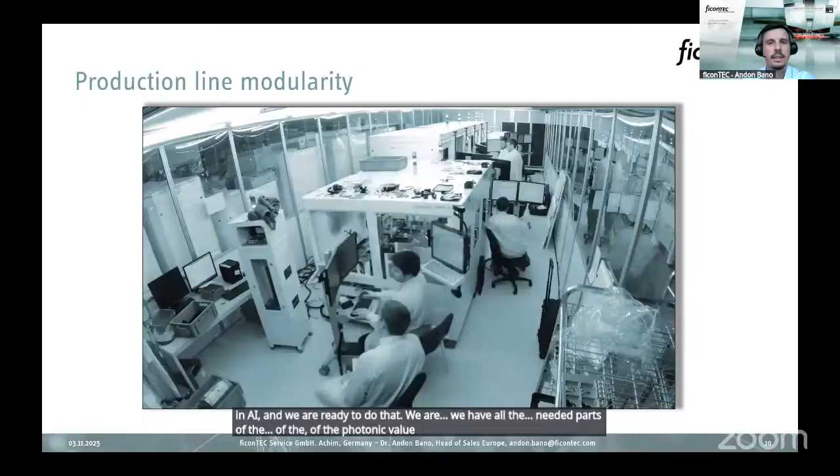We have all the needed parts of the photonic value chain in that sense. So the line is being first manufactured at ficonTEC, and then tested there, and then taken at the customer side for another test before it's ready for high volume process.

But we are not only enabling AI technology with photonics, we want also to make use of AI. Here's an example. Practically, our general scope is to improve the OEE, the overall efficiency of our machines or lines. When it comes to high volume, this is very important. You can improve it by reducing downtime, by improving performance, and by improving the quality of the products coming out, so the yield.

We have come up with machine learning algorithms which can act for preventive maintenance, but also for process optimization. What this means is the machine will be equipped with sensors, with a separate PC, which will be monitoring all the data coming from the sensors, from the axis, from the vision, from all the tools of the machine. While monitoring continuously, the machine might automatically recognize, let's say, an axis is vibrating more than usual, or an axis is not able to reach the certain speed it has in the past, and so on. Like this, you can prevent a failure by already intervening, and the machine will slow down itself and call for assistance.

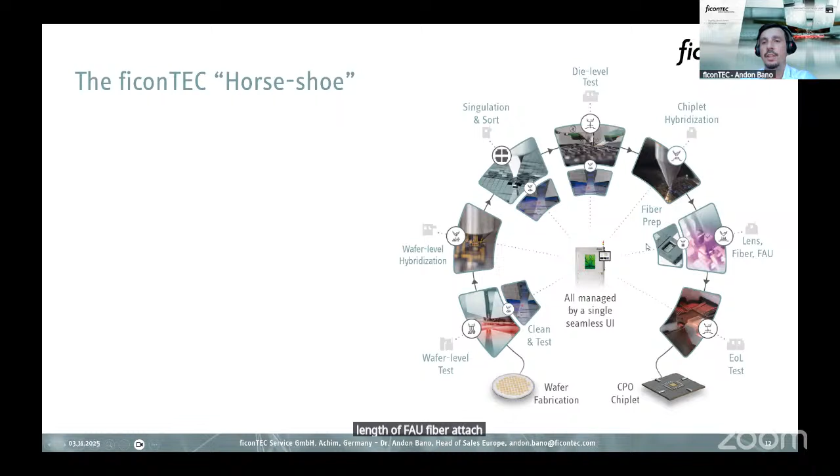This is what I call a horseshoe. You will receive the slides and get a big picture of what ficonTEC can do. I showed you a few videos - those are just some recent developments, but ficonTEC is able to offer you automated solutions starting from wafer testing and fabrication, from wafer testing and hybridization to die level testing, assembly, hybridization, combining different technologies, lens and FAU fiber attachments, but also fiber preparation, as you saw in the video, and also end-of-line testing. So practically, you will have all the assembly and testing cells that you will need for your final product.

It's a German technology with some international footprint. We have a strong R&D team, a big global service and support team, which is continuously growing, because as our machine base keeps growing worldwide, our service and support team has to keep the same pace. We have already more than 1,500 machines delivered worldwide, and more than 4,000 6-axis aligners delivered in the field, which is a proprietary technology of ficonTEC for active accurate alignment.

And all of these technologies are served by the same software. One software serves them all, which means you can reduce the training efforts on your team when you adopt ficonTEC technology. We will help you, as mentioned before, starting from an NPI tool to develop the process together, have a test vehicle, go to a production tool, some training, and then be ready for high volume manufacture. This way, together with ficonTEC, you could reduce the time to market when you're scaling up and have a plan for scale up in the near future.

Additionally, I would mention upgradability and future-proof technology, which means - let's say one example here shows a machine capable of starting with 100G up to 1.6 tera transceivers that has been in the market. So our technology is made to be future-proof, and we guarantee that by following a modular approach which makes your investment future-proof and lowers your total cost of ownership.

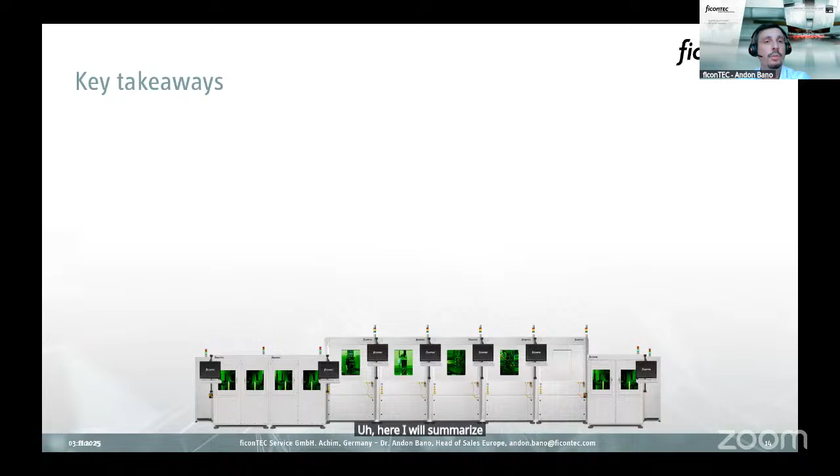Here I will summarize with a few takeaways. Starting from the beginning, I wanted to highlight that photonics is a key enabling technology, which means it has to keep up with the technologies it is enabling, which in this case is the AI topic. AI is having tremendous demand, which means photonics has to keep up with this demand. Automation, we believe, is key to reduce costs, increase volumes, and meet quality standards. Early adoption of automation will help you have an easier adoption and easier scale up.

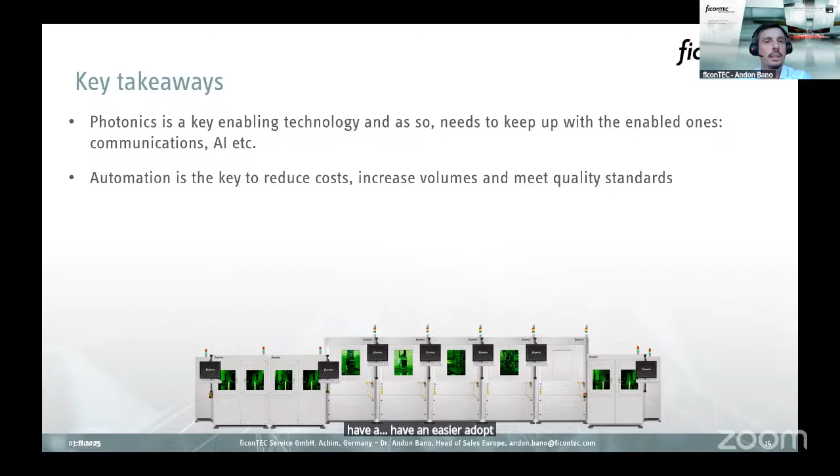ficonTEC will help you and will offer you a value chain starting from wafer to die to module level, both for assembly and for test.

And we are a strong partner starting from product development, NPI, up to high volume manufacturing. So with this slide, I will close, and please feel free to ask me any questions. This is a map of our presence worldwide nowadays.

Thank you very much, Andon. Great presentation. It's fascinating to see how fast ficonTEC grows and how much impact they have on our industry. So I wonder if there are any questions for Andon about the ficonTEC machines.

It's the last presentation, right? So maybe everyone is already tired. But if not, let me ask you myself. So what's the next step for ficonTEC? Now you can test wafers on double side. How do you foresee the further development of photonic integrated circuit testing machines?

In terms of testing, as mentioned, we came up with this double-sided wafer tester, but that's not the only thing that's needed. We are open to explore different collaborations. Our aim is to be industry agnostic. The first tester was launched with Teradyne, and now we're collaborating with Advantest. We want to make sure that our foundries and OSATs, our partners, can choose ficonTEC independently of what testing technology they are used to. This is something we are currently working on. But as mentioned during the presentation, wafer testing is only one of the bottlenecks that this field is facing.